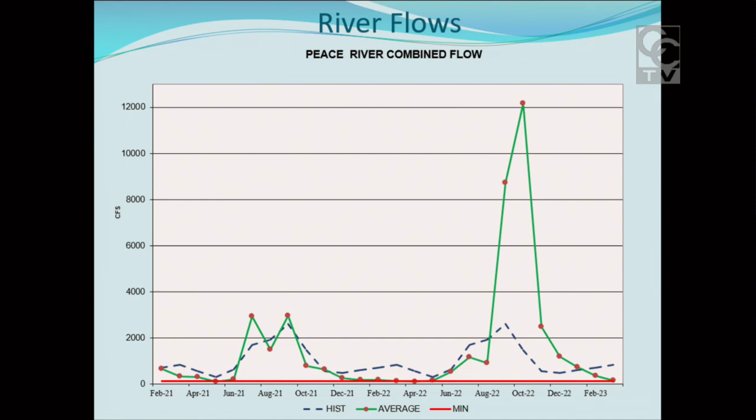River flows - as the rainfall drops, so does the river flow. We've trended down and we're now below the average as well as the 130 CFS requirement for river flow for us to take water from the river. So we are now off the river. The current flow is about 87 cubic feet per second in the river, so we're well below what we need to be at the 130 to take any water at this point.

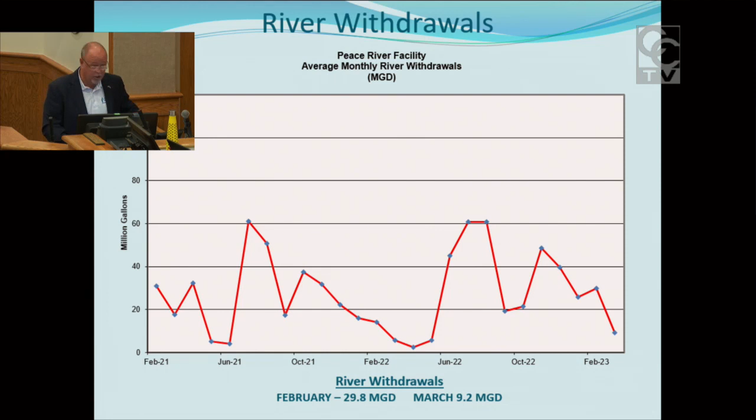River withdrawals. For the month of January and February, we averaged about 26 to 30 MGD from the river, so we were able to maintain the levels in the reservoir. In March through the 17th, we averaged about 9 MGD. After that point, we completely shut off, so we averaged about 5 MGD from the river in March, starting to rely on the reservoir for our supply.

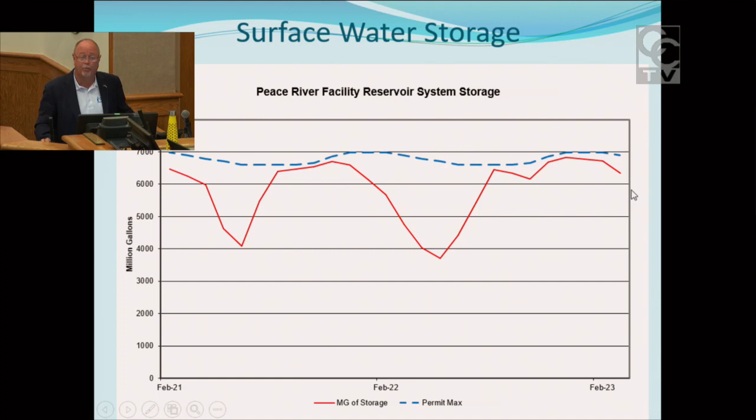Surface water storage - again, January and February, we were about 6.7 billion gallons. As we went into March, we started using water out of the system. As of the 17th, we were at 6.3, and as of today, we're down below 6 billion at about 5.7 billion gallons in the surface water system.

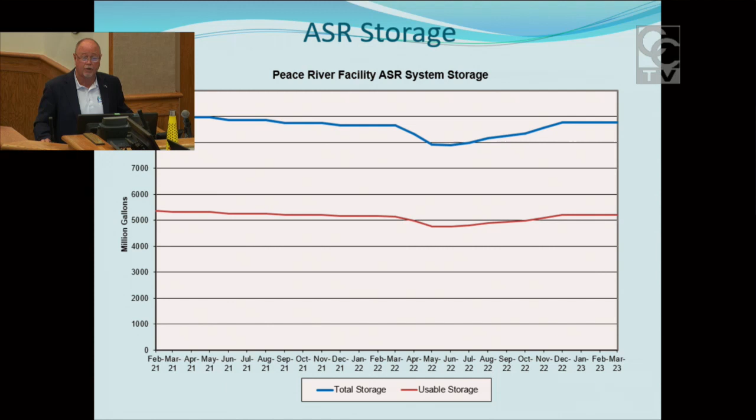ASR storage - as you can see, we've been in storage mode since about late November, December. We have about 8.8 billion gallons in that system. As of this Monday, because of the lack of rainfall, we have started using water from the ASR system. We're drawing out about 10 million gallons a day out of that system right now.

Taking a look at our estimated days of supply, if we were to provide our average day to you of about 28.5 MGD, we have 406 days of supply. If we delivered our contractual obligation of 34.7, we have about 333 days. So somewhere between 11 and 13 months of storage on hand at this point.

Now we're going to take a look at the water demands for the month of February. The authority delivered about 31.5 million gallons a day in February. Your county and city facilities delivered about 56.5 million gallons, total of almost 88 million gallons a day for the month of February. As usual, about 4.5 of that went to consecutive customers of Manatee County. Total used by the authority and customers was 83.3 million gallons.

Taking a look at Charlotte County first, your individual usage, you purchased about 13 million on average from the authority, produced about 0.8 from your Burnt Store facility, total of 13.8 average for the month of February. I want to point out on the long-term trend, looking at the 10-year average usage from 2012 to 2022, through the blue bars through September of '22, averaging about 1.8 MGD, 1.8 percentage increase per year in your usage.

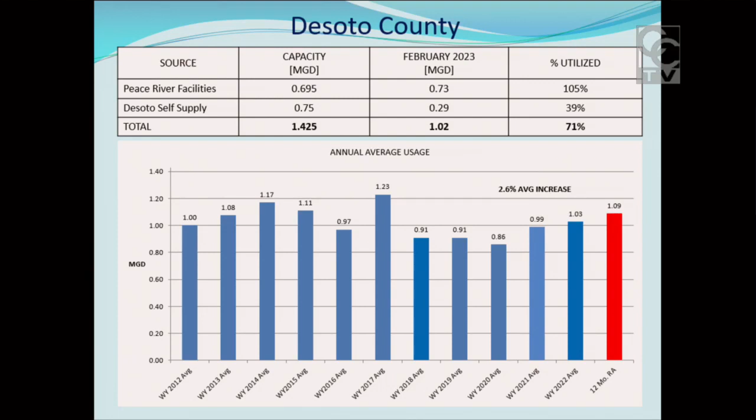Sarasota County used 15.76 million gallons for the month, imported about 3.75, and produced about 6 MGD from your facilities at Carlton and Venice Gardens. Total usage was 25.5 million gallons per day. Looking at your 10-year average, almost 2%, 1.9% average growth for the period.

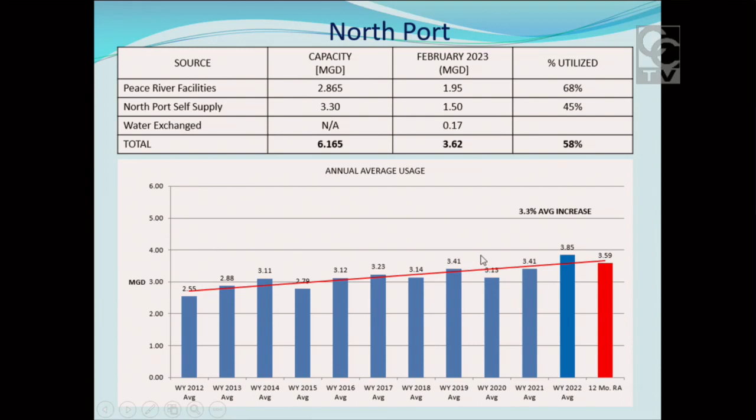And finally, City of North Port. City of North Port used almost 2 MGD from the authority for February, produced about 1.5 million, exchanged about 0.2 from Sarasota County. Total usage was 3.6. Their long-term average gets the award for the highest, at 3.3% average growth per year over the last 10 years.

Rolling it up to looking at the total regional demand for the system, looking at the growth over the 10-year period, 2.2% total average growth including the utility, the customer utilities, and the authority system. Wrapping it up, we used about 88 MGD for the month of February. That left just under 17 million available for delivery, or 84% of our available capacity was utilized for February.

I have one other item I'd like to touch on real quickly. We wanted to provide an update regarding the regional system's conversion to free chlorine. At the request of the Florida Department of Health and the FDEP, local utilities initiated a temporary change in our disinfection process, in what's commonly called a free chlorine conversion of the distribution system.

The authority and all of our customers use chloramines, which is a mixture of chlorine and ammonia. This temporary conversion basically means we turn the ammonia off and feed only chlorine into the system for a period of time.

Other systems in the area use it. City of Venice is a full-time user of free chlorine. City of Sarasota uses free chlorine on a regular basis, so it's a common practice.

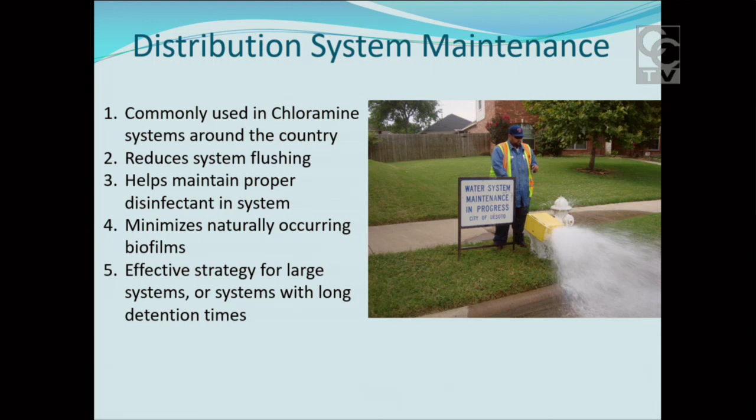Once this is done, at the end of May, we're going to meet, work over the details with your staffs, evaluate how well it went, and then determine if we need to do another conversion in the future. So with that, I'd be happy to answer any questions on that or on the regular presentation. Board members, any questions? Thanks, sir. Great, thank you.

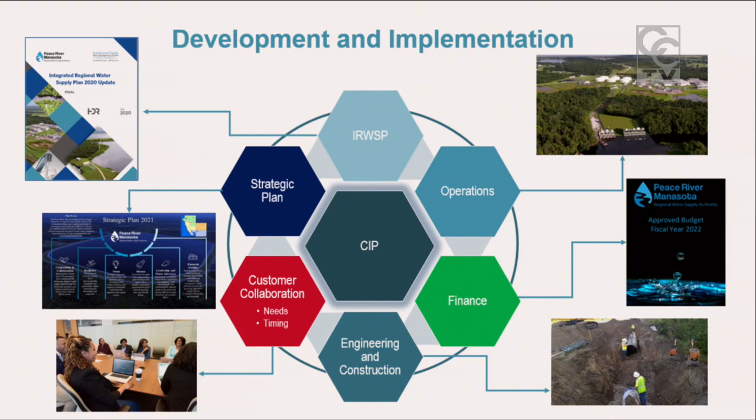So let's take a look at the overview of the next 5 years and our 20-year CNA budgets. Just a little by the numbers here — we've got 14 projects identified over the next 20 years. 8 of those projects are regional transmission main projects; 3 of those will occur within the next 5 years, 2 of which are currently under construction.

We have 4 water supply projects, 3 of which are in our current 5-year CIP. And we have 2 system-wide benefit projects, both in the next 5-year CIP. The costs and timing of these capital projects are coordinated not only with your staff, but also with the Water Management District and any federal or regulatory agencies, so that we can ensure we're getting the most funding possible for our projects.

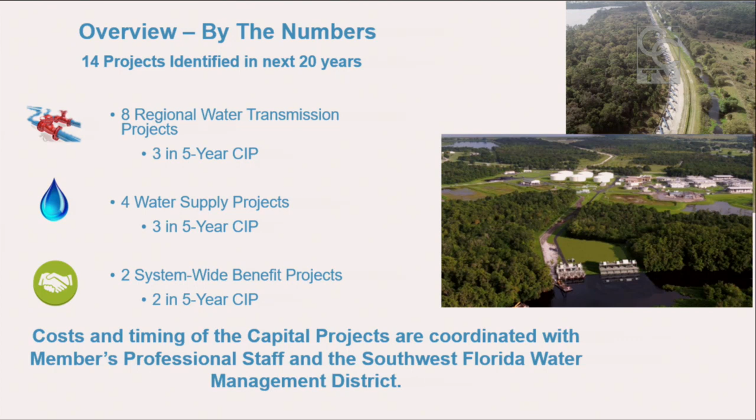Looking at our 5-year CIP, it's broken down here. We have a total 5-year CIP budget of about $815 million, broken down between water supply, transmission, and system-wide benefit projects. We have about $663 million in our water supply project bucket, $123 million in our transmission systems, and $29 million in our system-wide benefit projects.

I wanted to call your attention to this water supply bucket, the $663 million, which is really comprised of 3 projects: the PR3 project, the water treatment plant expansion — the surface water expansion project — and the brackish water RO project. Both of those latter projects are currently in the planning stage; however, only one of those water supply options will actually move forward into construction in the next 5 years, so keep that in mind.

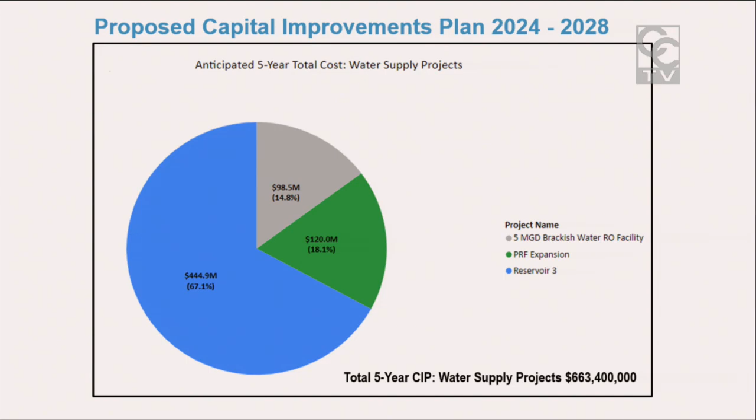We've been very fortunate in the past to receive grant funding, not only from the Water Management District, but also from state and federal entities. In the 5-year CIP, we anticipate about $184 million in grant funds, leaving the authority's estimated exposure at about $631 million.

As we move forward into the 20-year CNA, or Capital Needs Assessment, that's from 2024 all the way out to 2043, that is also inclusive of that 5-year CIP. We have a total 20-year CNA of just over $1 billion, comprised of approximately $703 million for future water supply projects, $360 million for water transmission main projects,

and that same $29 million for those 2 system-wide benefit projects. Again, looking at the estimated grant funds available, where we see about $306 million of potential grant funding to help offset those capital project funds, leaving the authority's exposure at around $787 million. Again, we've kind of blocked off this first 5-year heavy lift.

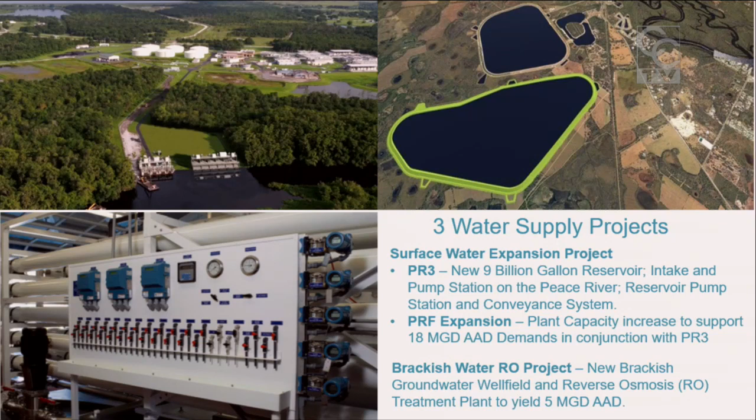Our 3 transmission system projects include the Phase 3C pipeline project. This is approximately 7 miles of 42-inch diameter water main to serve the growing demands in northeastern Sarasota County. That project is currently under construction.

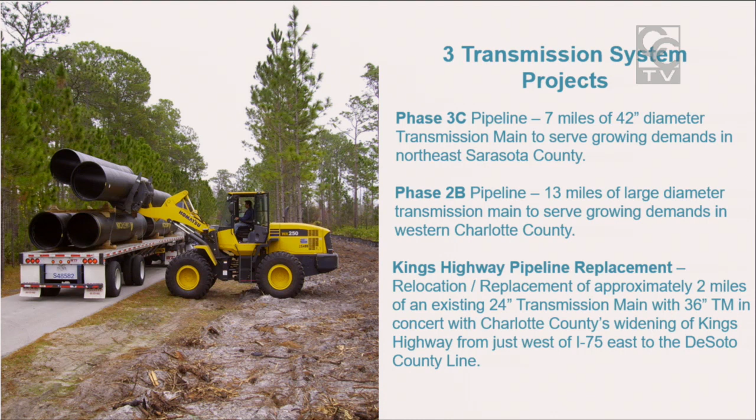The Phase 2B pipeline project, it's 13 miles, again, 42-inch diameter transmission main to serve the growing demands in western Charlotte County, and this project is nearing construction. And then the Kings Highway pipeline replacement project. This is a relocation of an existing 24-inch diameter transmission main as part of the county's Kings Highway widening project. We'll be relocating and upsizing about 2 miles of that, from just west of I-75 along Kings Highway all the way to the DeSoto County line.

Our 2 system-wide benefit projects include the Water Resources and Construction Department building. Here in the upper left-hand corner and center, you can see we are currently working out of the old ranch house and associated garage. These buildings are approximately 60 years old. We've been through numerous renovations on them already, but they really have reached the end of their useful life. We did sustain some damages during Hurricane Ian to the buildings, and we're currently looking at options to get some new facilities out there.

The second system-wide benefit project is the partially treated surface water ASR project. This includes design, permitting, and construction of facilities to partially treat our raw surface water from the reservoir system and then inject it into our ASR system. Currently, we're injecting fully treated drinking water into the ASR system. We're proposing to take raw water from the reservoir, partially treat it through filtration and disinfection, and then put that into the ASR system. It'll provide cost savings as well as increase yield and our system efficiency.

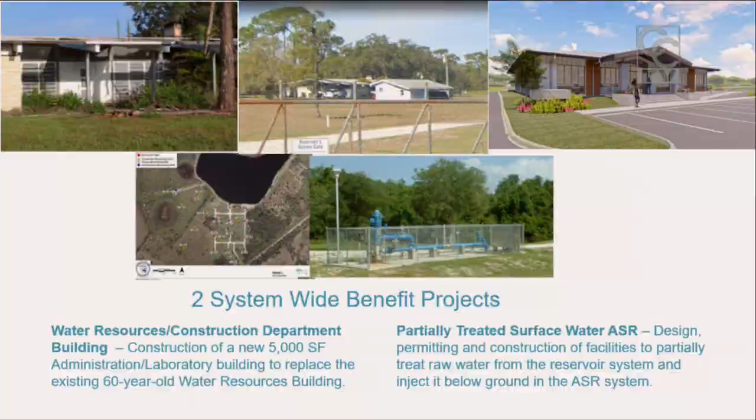So what are our next steps and schedule? The professional staff were provided a copy of this draft CIP and CNA at our March 8th board meeting, and any comments that we receive or feedback we will incorporate into the draft. We will bring that back to the professional staff for their review at our May 3rd professional staff meeting. Take any comments the board may have, put them all together, and bring the final draft back to the board for the June 7th meeting where we'll seek approval of the CIP and CNA.

I just wanted to note that approval of the CIP and CNA is not an approval of a project. It's just approving how it's incorporated into the budget. So with that, I'd like to take any questions you might have.

Board members, you have any questions for Ms. Terry? Any discussion, direction? It's a lot.

Okay, well this is just strictly for board discussion and direction for the 5-year CIP and 20-year CNA, and it will guide the fiscal year 2024 budget development in this area. So any suggestions, additions, or comments?

I have one question. The project that you said was going to drop into the 20-year out of the 5-year, which one was that? It depends — we've got 2 water supply options moving on parallel tracks. We've got the surface water expansion project, and we have the brackish water RO project. We're moving those along and developing final budgets.

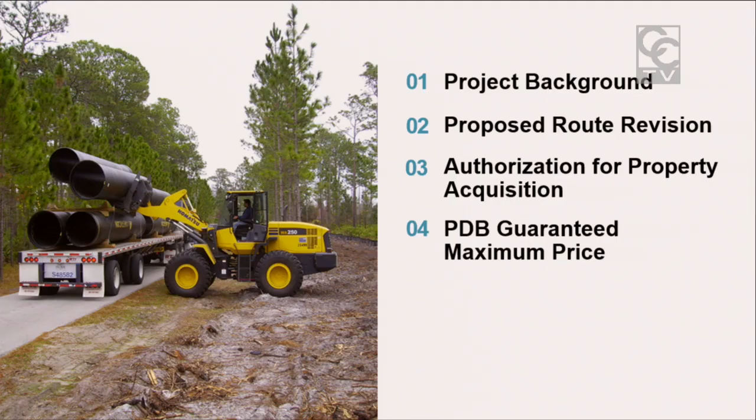I'll be discussing the background of the project, talk about a proposed route revision from our design build team, and then discuss the authorization for property acquisition — this would be our temporary and permanent easements. At the conclusion of item number 3, we'd have our first motion, and that would be to accept the proposed route revision and the easement width that's going to be proposed. Item number 4 is our progressive design build guaranteed maximum price.

After that presentation, there'd be a motion on whether to accept and amend the existing contract with Garney Construction to include the guaranteed maximum price.

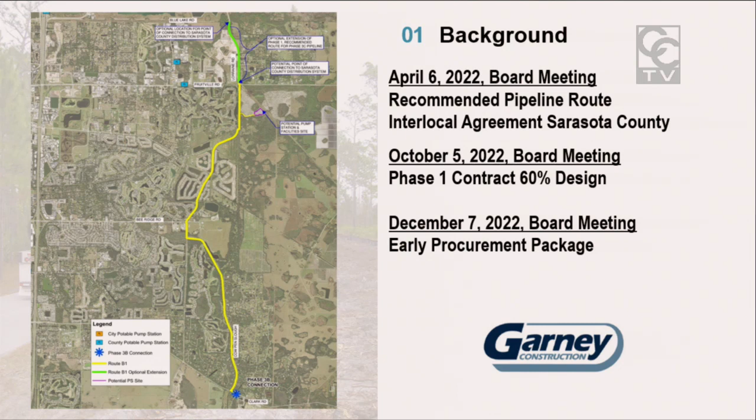So, background of the project: in April of last year, the board approved the recommended route for the Phase 3C pipeline based on our feasibility and routing report. At that same meeting, the interlocal agreement with Sarasota County was approved, funding the project. In October of last year, the Phase 1 contract for 60% design was approved by the board. And then in December, the board approved our early procurement package by means of owner direct purchase, which saved about $500,000 on the project from tax savings.

Before I go into the design changes being recommended, I'd like to acknowledge some of the staff that has worked very hard on your project. I can't put all the names up here — we wouldn't have time to talk about everybody. But it's truly a monumental task that they've gone from 0 to 60% design in 6 months on such a large project.

Starting with Sarasota County: Mike Milet, the utility director, has made himself available for any meeting we've requested, and his direct involvement has led to cost savings on the project. Greg Rouse has been our point of contact with the utility department. Stoney Pope has helped us with the hydraulics in the county system. And Peter Peduzzi, the PM for the Lorraine Road extension, has kept us apprised of his project, in which about a third of our pipeline goes through his project area, so that coordination has been critical.

Our general counsel has helped us with our first progressive design build contract, and my first time with easement acquisition — so we appreciate that, nice young man Doug Manson, Brian Bolvis, and Carlin Kowalski. On our design build team, they have met every milestone we've put in front of them, so thanks to Mark Kelly with Garney, Ben Turnage with Ardurra, and Freddie Betancourt with Wade Trim. And then our owner's agent has helped us with very timely reviews of that contract and technical reviews from the pipeline design, so thanks to Mike Condren, Todd Basso, Liz Minyard, and Rod Pope.

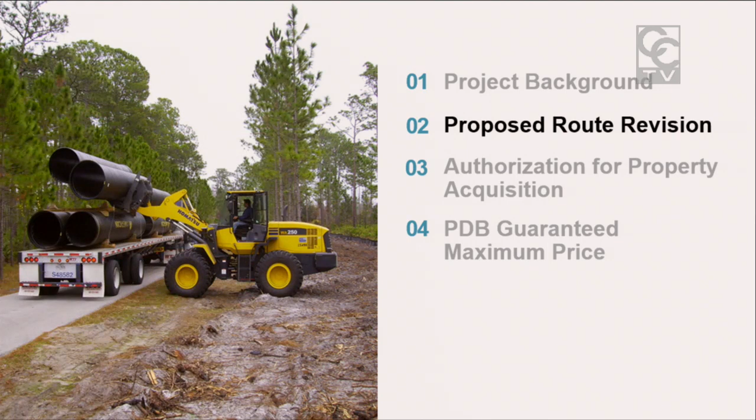So our second item, the proposed route revision. This is a recommendation by our design build team. The exhibit you see in front of you here is from the feasibility and routing report.

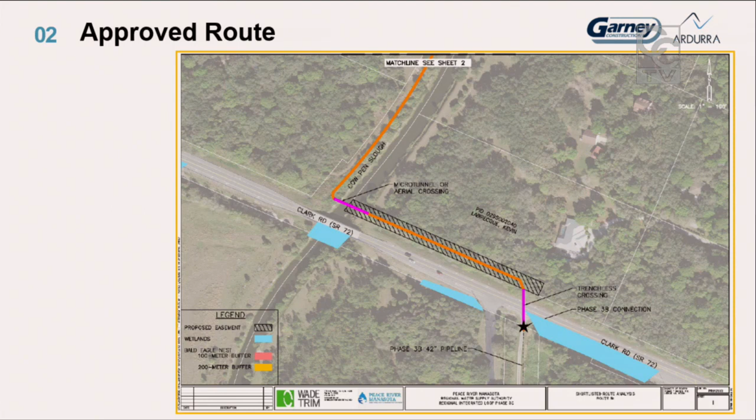It covered crossing Clark Road, running left-right on your screen. It was originally proposed to cross Clark Road on the eastern side of Cow Pen Slough, going across to a proposed easement on a private residential property, then proceeding west across Cow Pen Slough and then north. I'm going to rotate this slightly for ease of comparison with the current route shown here.

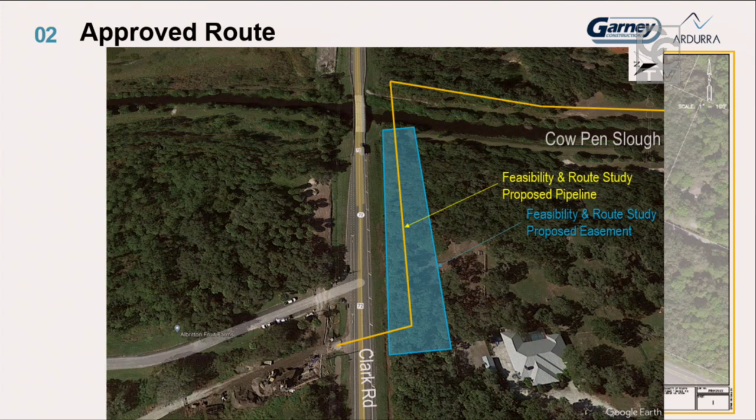This is in blue, the proposed easement on private residential property. What the team has done is take a deeper look at long-term planning with DOT, the existing utilities out there, and constructability. Really, the main reason for the change is taking advantage of existing easements out here.

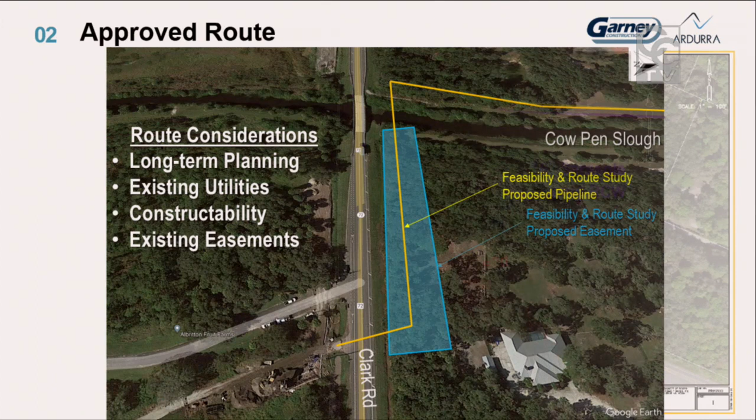So the design build team has recommended to stay on the south side of Clark Road in lieu of crossing over immediately. The reason is there's a 30-inch diameter Sarasota County water main already on the south side of Clark, with an existing easement over it. Through coordination and collaboration with Sarasota County detailed design, we've determined that both pipelines can fit within the limits of that easement.

So those two properties on the south side are already encumbered by a utility easement. For that reason alone, it just makes sense to stay on that south side. But there are other reasons for making that change, as mentioned above.

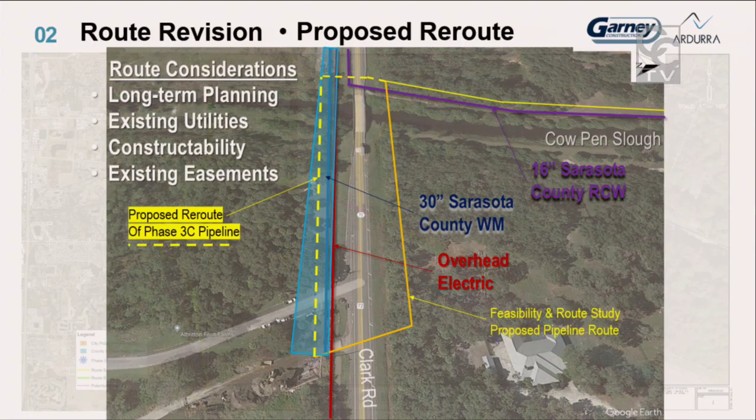So I'd like to take a minute if anybody has any questions about the proposed change in crossing location for Clark Road. Board members, any questions? Makes sense. Great, no, thank you for that.

I know, speaking to Mike, and I appreciate you mentioning his collaboration. He's got a lot of things on his plate, but he was very encouraged by this, and it makes a lot of sense, so appreciate the change. Great, thank you.

So we are requesting a total of 75 feet for the entire length of the pipeline project. However, we are requesting a little bit more on the south side of the project.

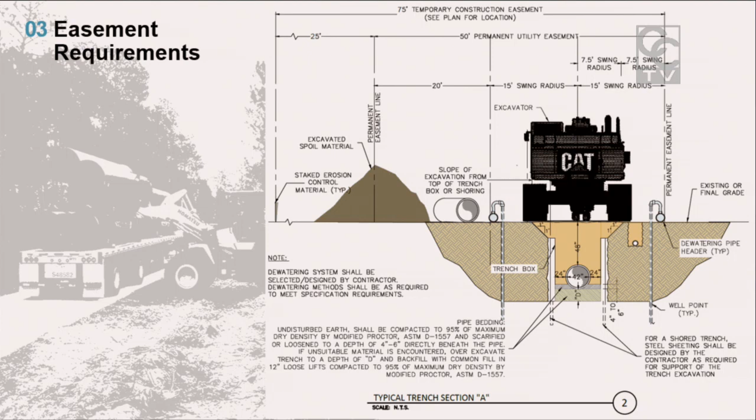For the first mile north of Clark Road, we are parallel to a 16-inch diameter reclaimed water pipeline at Sarasota County. We're requesting an additional 5 feet of temporary construction easement, so a total of 80 feet for that first mile, which gives the contractor some flexibility to try to avoid relocating that 16-inch diameter pipeline. So essentially it's 75 feet the whole way, except for that first mile, which is 80 feet.

In your board book, there are legal sketches and descriptions over 14 parcels. Each one has a permanent easement legal sketch and description, and a temporary construction easement description. Those would be entered into the amended resolution as exhibit number 2.

This amendment to the existing resolution, which covered just the alignment last year, now covers the change in route on the Clark Road crossing and the easement acquisition we just discussed. So before we go to the motion, does anybody have any questions about the width of the easement we're requesting?

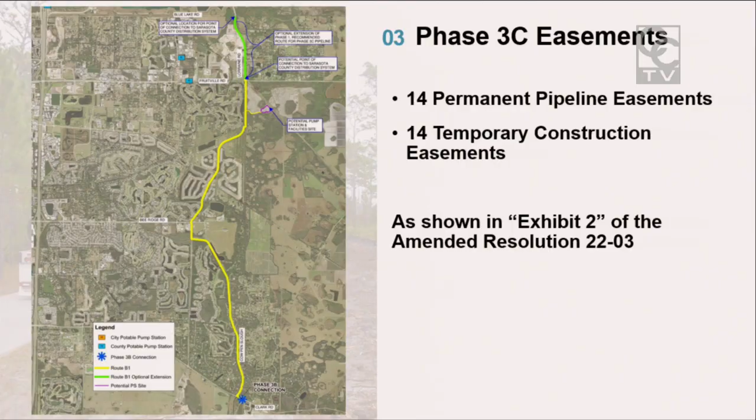Don't believe so, Mike. Great, thank you. Okay, we're ready for the motion?

Yes, sir, for the first motion for A. Do I hear a motion? Move approval. Second. I have a motion by Commissioner Cutsinger, seconded by Commissioner Truex, to amend Resolution 2022-03 for the Regional Integrated Loop Phase 3 Interconnect. All in favor signify by saying aye. Aye. All opposed, like sign. Motion carries 4-0. Okay, great, thank you.

All right, appreciate that. Our fourth and last item for Phase 3C, we've got the Progressive Design Build Guaranteed Maximum Price. This would be an amendment to the existing contract with Garney to include the Guaranteed Maximum Price, which covers final design and construction of the pipeline.

So where we're at with the Guaranteed Maximum Price: the design portion is about $2.26 million, the construction phase of the pipeline is at $37.8 million, and we have contingency and allowance in the amount of about $9.9 million. Now, the contingency needs justification and approval from the authority to use on the project. So the total guaranteed maximum price we're requesting is about $49.9 million.

We do also have what I'll call parallel costs to this project, costs not included in the guaranteed maximum price, but which the project budget will incur. These include the Phase 1 contract with Garney already completed for 60% design, owner direct purchase of pipes and valves, work orders with Stantec for property acquisition and field data collection, our owner's agent work orders, an allowance for mitigation and insurance, a third-party review being negotiated with the district, a legal assistance allowance with our general counsel, and our estimated cost for easements. The total of those parallel costs is estimated at about $12.3 million.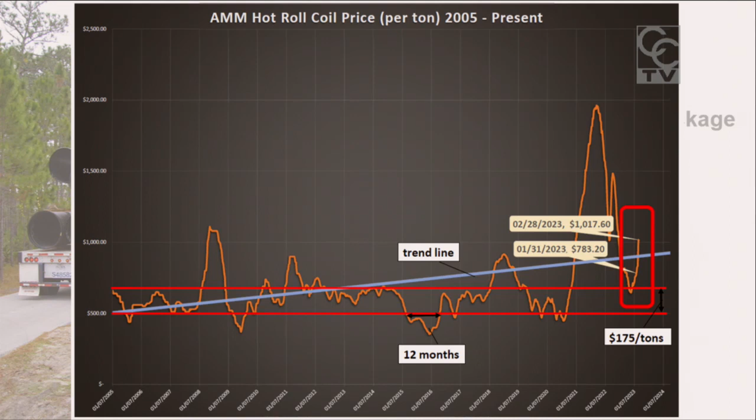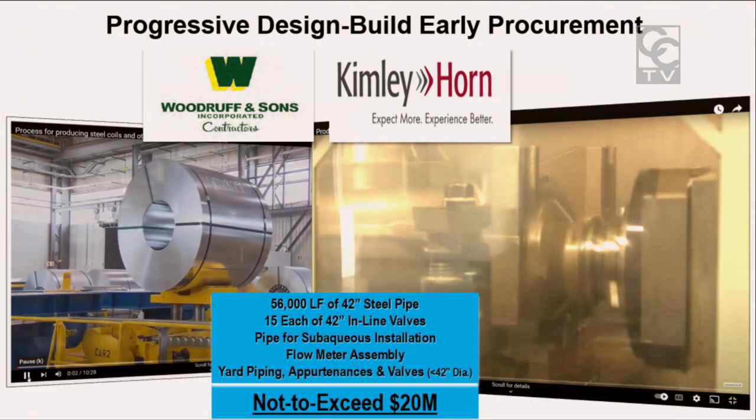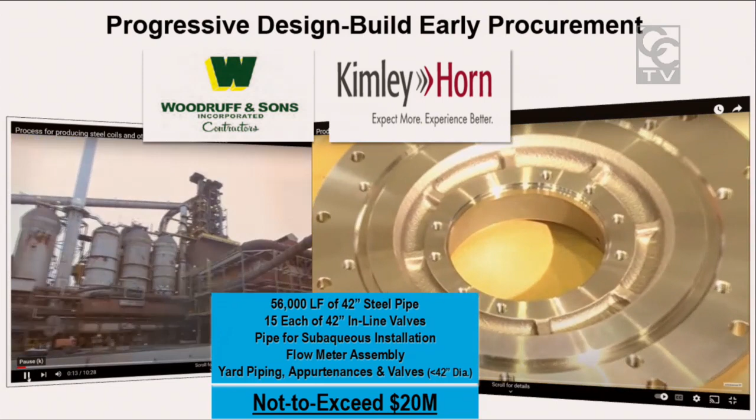So we are requesting, through owner direct purchase, the ability to purchase 42-inch diameter steel pipe, 42-inch inline butterfly valves, pipe for our subaqueous crossing of the Myakka River, likely HDPE, a flow meter assembly, and associated yard piping, appurtenances, and other valves less than 42-inch in diameter, with the value not to exceed $20 million.

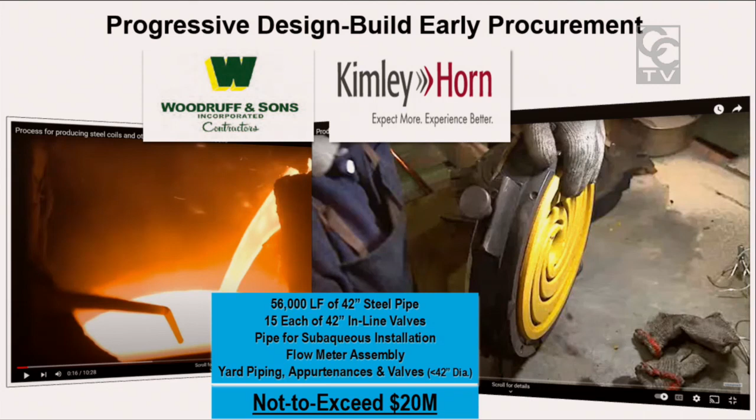So does the board. I'll pause for any questions the board might have before we go to the motion to allow us to do owner direct purchase not to exceed $20 million.

Board members, any questions? Okay, Mr. Chairman. Yes, sir.

Move to authorize the executive director to purchase materials for the regional integrated loop Phase 2B pipeline, not to exceed $20 million, for items which are purchased under Section 5.4.4 of the authority's procurement policy.

Okay, a motion by Commissioner Truitt. Do I hear a second? Okay, second by Commissioner Cruz.

Any further discussion? Just that I think this is a great idea, and if there's any way we can incorporate this in the future for cost savings, it would be an opportunity. It's not taking money out of the contractor's pocket, but it's putting money in ours. So I think we should try to do that when we can. Thank you. All righty, no further discussion.

All in favor, signify by saying aye. Aye. All opposed, like sign. Motion carries 4-0. Thank you, sir.

Thank you. Agenda item number 7, Mr. Terry.

Mr. Chairman, members of the board, for the record, Terry Holcomb with your staff. Regular agenda item number 7 is an update to the Peace River Regional Reservoir number 3. This is our 30% update as part of our preliminary design, permitting, and third-party review phase. The presentation is for informational purposes only. There's no board action required today.

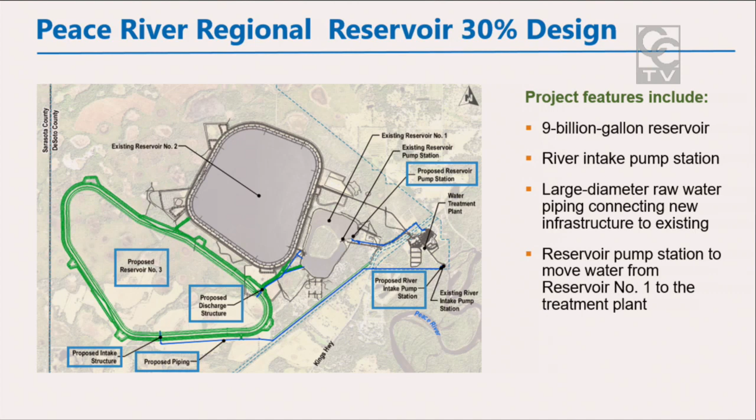Just a real quick general overview of the schedule. We talked about it taking 10 years to develop a project of this magnitude.

We indicated back in the 2020 update in the Integrated Regional Water Supply Plan that new demands would be needed in the region by 2030. So working backwards, siting and feasibility study took place, design and permitting, anticipated construction, knowing that it may take up to 2 years to fill that new reservoir.

Here is our general schedule. Right now, we're in the preliminary design phase, the permitting and third-party review. That's shown in the solid orange. This is where we are in the project's progress. This phase began in March of 2022 and will conclude this September.

It will provide preliminary design for the project features, including their location, the size, how many, and the ultimate configuration. The permit applications will be submitted for this project in September, and that will conclude the preliminary design phase for the project.

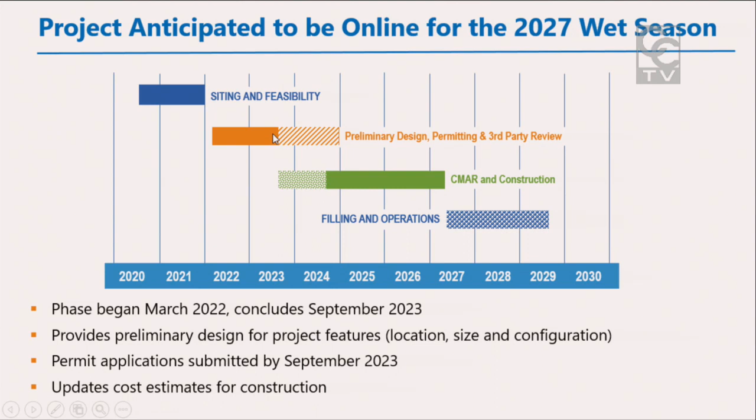The design documents do include an updated cost estimate, and the Water Management District will be completing their third-party review of the project, including not only the design documents, but also that cost estimate that comes along with it.

Right now, I'm going to turn it over to Katie Duty to cover the design updates from our 15% presentation to our 30% presentation here.

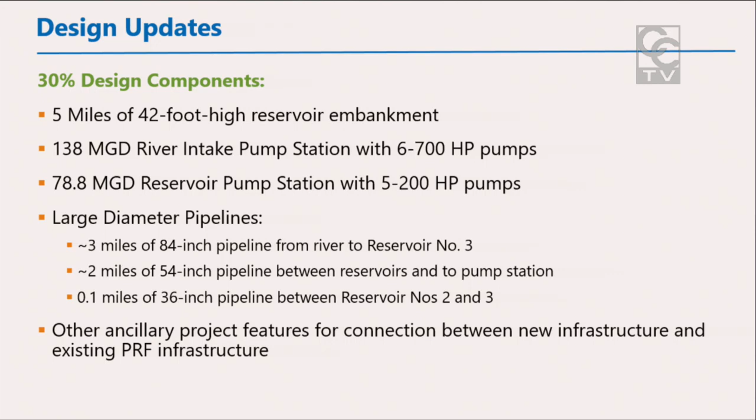Terry mentioned the 2 pump stations we have. So the river intake is 138 MGD with capacity or space to be able to add pumps for future capacity later. There's also a 78.8 MGD reservoir pump station she mentioned. And then we've got many miles of large diameter pipeline that will connect the new river pump station over to the reservoir, interconnection between existing water storage facilities, and then back over to the plant.

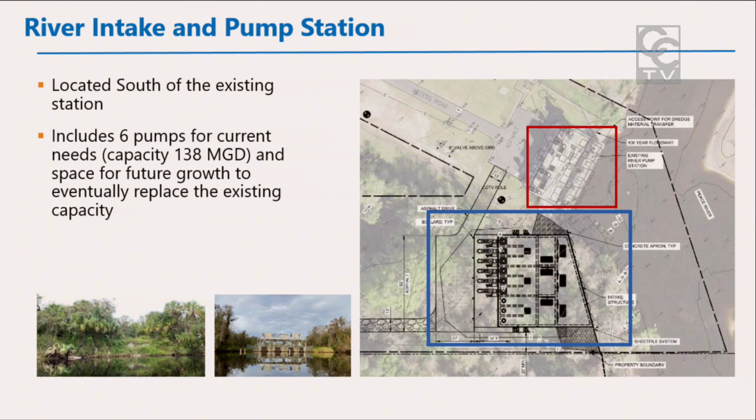Next up is all the conveyance. This diagram shows the existing in black and the new conveyance in orange. And at the 15% design, we had worked with authority staff to really maximize flexibility of how water could be wheeled around the water campus.

It resulted in a price that might be a little bit too expensive, and so we really sat back down with the authority staff and worked on what is needed for how to operate. Still providing some flexibility of moving water, for instance, between reservoirs 2 and 3. That's an important consideration for operating the facility and having maximum water quality and flexibility for where water comes from.

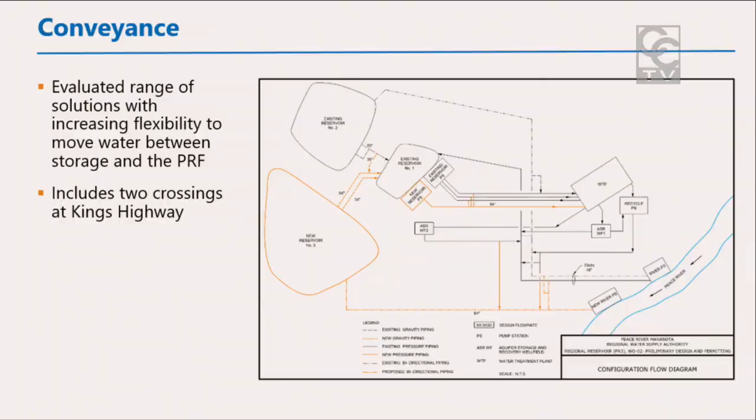But we've dropped out some of the large diameter piping that would have allowed water to move from Reservoir 3 to a different part of Reservoir 1. So there's some 54-inch pipe that's come out, as well as some aerial crossings. And really, at 30% design, this balances the need for flexibility while also value engineering out some things that may not have been used as frequently, such as a gravity line back to the plant. This also includes a little bit more detail on 2 crossings at Kings Highway.

Our reservoir design further progressed, and we're really focused on detailing out the cross-section of the embankment. These particular details, how the reservoir is going to function both in normal operating conditions and emergency operating conditions, is really important for the permit we're going to submit later this year. That'll be the core of what we're looking at as we work through permitting.

So the team has progressed the design, the seepage control system, and at 30% we've got 2 possible cross sections, one very similar to the existing cross section, one a little bit different, will function the same. We're looking at constructability right now of which will be easier to construct, what's more cost effective, what's going to have the least risk when it comes to dewatering, which is a big component of embankment construction.

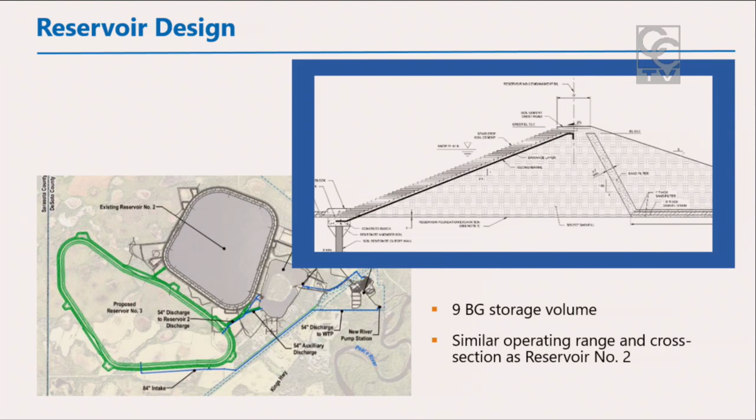Moving to the reservoir pump station, this is again adjacent to the existing. The red box on the left side of the image is the existing Reservoir 1 pump station. The blue box is the new one. It includes 5 pumps at this location.

The team spent a lot of time working with authority staff to evaluate the pros and cons of building a new pump station adjacent to the existing versus replacing or rehabbing the existing, expanding it. There's a real need to have the existing pump station in operation, that's how water gets from any of the water storage back over to the plant. So during construction, there cannot be interruptions to that ability to operate and move water. And so it was decided to place the pump station adjacent to it.

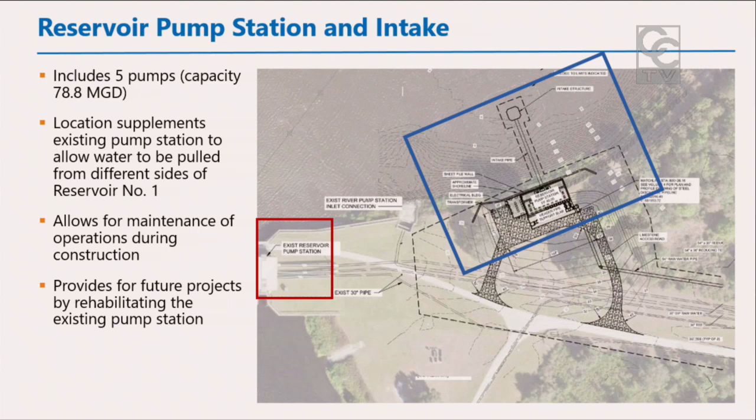The intake for it comes out of the northern side of Reservoir 1, so back to operational flexibility and maximizing water quality - that was part of the siting decision. And later, that Reservoir 1 pump station, because it's still there, can be rehabbed and will help future authority projects in being able to move water around.

So a big part of the early design has been field work. For site characterization, we've done over 100 explorations. That includes borings, cone penetrometer, putting in monitoring wells, really understanding the groundwater and how it changes seasonally. That's another big part of both design and permitting.

We also recently completed over 26,000 linear feet of geophysical investigation. This is to do some seismic investigation and also look at sinkhole propensity and make sure there's no issues related to that. We don't see concerns on the site for those issues, but as part of a thoroughness of design, we really need to make sure the site is suitable, including issues related to karst.

We've completed generally all of the site topography. We've completed the bathymetry. There's a little bit more field work when it comes to data collection. In about a month, we'll get our geotechnical report from our driller that quantifies this - we've been getting progress reports as we go, but we'll get the final site characterization report from them.

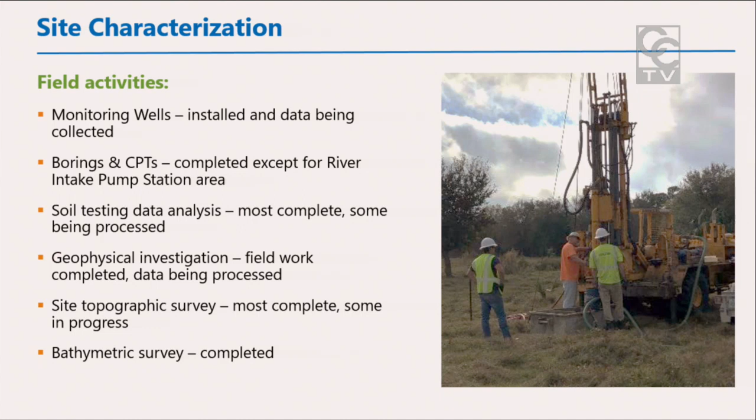Environmental is the other big field component, and so the wetland delineation, as I think I talked last time, we'd completed all of the wetlands delineation in areas impacted by the construction, and the team has really been working through how do we mitigate for those wetlands. It's in 2 different basins. There's some tightness on available credits when you look at banks in those same basins, and how do we make sure we fit the project site and minimize environmental impacts as we have them.

The team has recently been working on maximizing our on-site creation potential. The authority staff has done a really great job of having an on-site mitigation for Res 2. How do we expand on what's worked really well and also save some money? It'll be a less expensive way to work through mitigation if we can.

And then we've had some ongoing threatened and endangered species surveys. There are certain times a year we have to do nesting surveys or other species. Those are just about wrapping up, and we'll have a report of the work out there that'll be part of our permit application later this year. So just to quantify real quick, the figure on the right shows the bolded colors that show the wetlands that are being impacted by the project site.

It's a little bit faint, but you might notice the red outline is the new infrastructure going into the reservoir. You can see we've adjusted the reservoir footprint to try to avoid hitting some of the higher quality wetlands, really trying to get that balance of maximizing storage and minimizing impacts.

So this is the quantification of where we are right now on functional loss, what's being impacted by the construction.

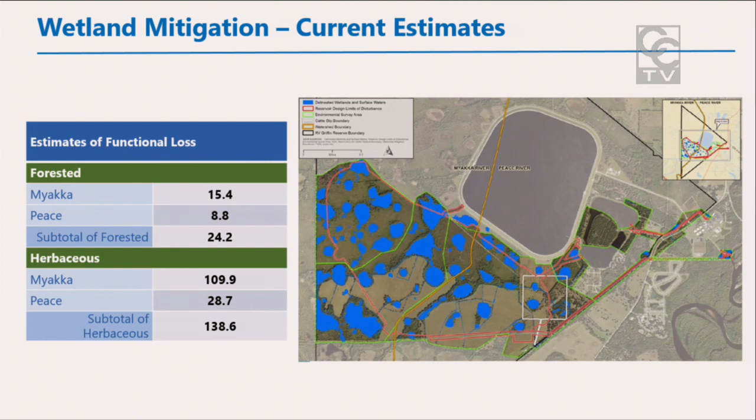Just a quick update on permitting. We've got some upcoming pre-application meetings with both DEP and the Corps of Engineers. We've had pre-application conversations with them, and this is continuing to progress. We're looking to submit a conceptual permit application next month, and then we'll follow up with a full permit application in September. Other agencies also consult on these permits, so we've been coordinating with U.S. Fish and Wildlife and National Marine Fisheries Services just to make sure we're considering the things they're concerned about so we don't get surprises later.

And with that, I'll turn it back to Terry.

Thank you, Katie. So as part of HDR's work order, we requested a Class 3 cost estimate to be completed with the 30% design. What I wanted to do is just kind of real quickly go through exactly what a construction cost estimate classification system is and what does that mean with respect to the PR3 project.

What you see here is a chart that's developed by the Association for the Advancement of Cost Engineering. This is a widely used industry chart defining the level of accuracy within construction cost estimates. On the x-axis, this is the life of a project as it goes through the design process, starting at basically project conception, going all the way over to 100% design.

On the y-axis, you can see the range of accuracy given your estimate amount. Your estimate amount travels along this line in the middle, and the range of accuracy starts very wide at the concept phase. You could be minus 50 to plus 100% from your cost estimate, and that's probably within your range of accuracy. As the project moves through design, through the 15%, 30%, you're into a Class 3 estimate. This is more parametric—you're using projects that have been developed recently, you might be getting a couple quotes from vendors on things. As the project progresses, that range of accuracy decreases. The more certain you are in your design, the more accurate your cost estimate becomes.

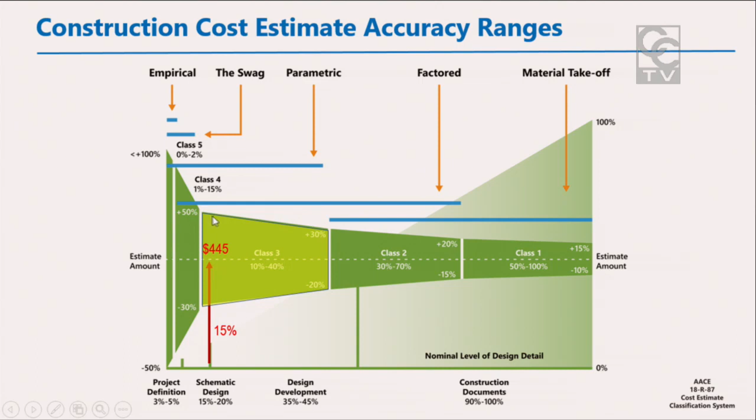So just taking a look at where we were at our 15% cost estimate: we were there in October, and the estimate was at $445 million. This came with a range of accuracy anticipated of anywhere from minus 30% to up to 50%—that's about $311 million all the way up to $660 million. That's the range of accuracy at that 15% design we were at.

Today, at the 30%, we are at a cost estimate of $343 million, about $100 million less. That range of accuracy has also decreased because we've become more certain in some of those design elements. So that range of accuracy is about minus 20 to plus 30.

Now, as we move forward into the final design and engineering phase, we would anticipate that range of accuracy will become closer—it'll decrease, and our cost estimate will be a little more certain. We would like to engage a construction manager to come into that final design phase. When you bring in a construction manager, you have some more value engineering that can be done. I believe in Mr. Knowles' presentation, he talked about that early engagement during the Phase 3C project where they were able to identify some cost savings measures. It's really beneficial to engage that contractor early on, so we anticipate doing that as this project moves through the final design phase.

So Katie kind of touched on some of the items that we were able to find some cost reductions in between the 15% and the 30% design. In December, we had a presentation to the board where we were looking at some of these potential cost reduction options. At the time, those 6 options totaled about $80 million, and you can see we've been able to drop the budget by about $100 million.

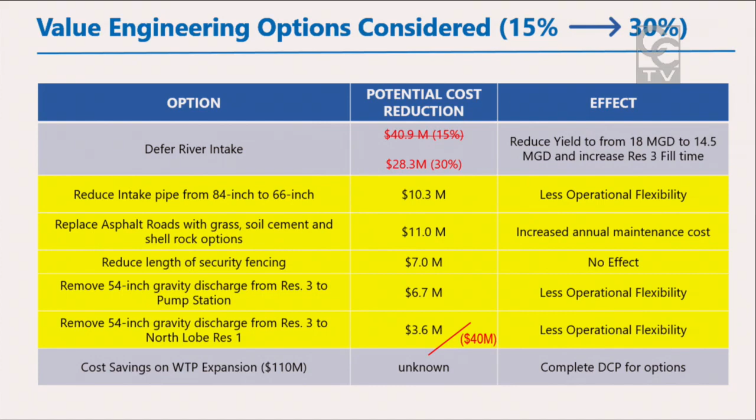And then the last item here, the cost savings on the water treatment plant expansion. Again, we are currently in the preliminary design phase. We have our owner's agent completing a design criteria package. We've got the pilot plant out at the facility now. This $110 million, again, keep in mind, is the conceptual budgeted number on the left-hand side. As we move through this design criteria package, we anticipate getting a better number and seeing maybe some potential for cost reductions.

We were able to remove some of those large diameter pipelines, might have a little less operational flexibility, but it's still moving the water where we need it to be. The reservoir, you look at the cost of the reservoir, it really didn't change that much, which is what you would expect. It's a lot of earth movement, right? A lot of dirt. There's not a lot of mechanical, electrical equipment, not a lot of volatility in dirt. So that cost remained the same.

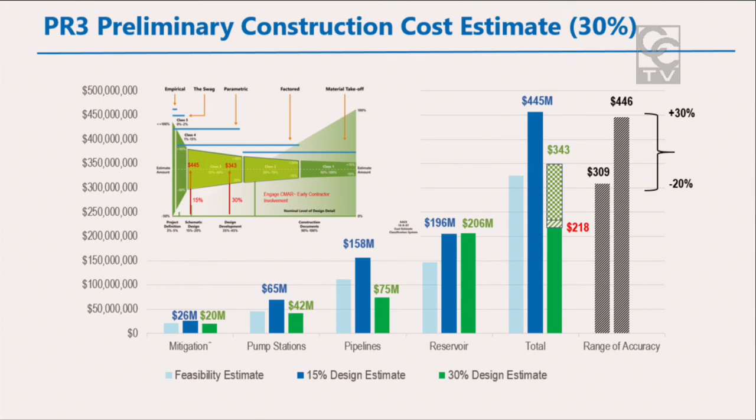You roll those all up, and you can see the difference between the total cost of the PR3 project at 15% at $445 million to the 30% design estimate at $343 million. Just again, to remind you, we're at a class 3 estimate, so we have a range of accuracy anywhere from -20 to +30. But also keep in mind that we have $112 million committed from the Water Management District for this project. And as Mr. Manson noted, we have $12.5 million, hopefully, within the legislative budget for the project, taking the customer's contribution down to about $218 million for the PR3 project.

Talked a little bit about those funding opportunities, just wanted to break out the design and the construction phases here. So the preliminary design was at $7.25 million. We will be moving forward into final design and have an estimate of total design fees of around $18 million. However, we have secured $14.75 million in grant funding for the design of this project. 100% of the preliminary design has been covered, and about 90% of the final design is anticipated to be covered for this project.

With additional funding from the Water Management District, the authority and their customers' exposure is about $1.65 million for a full 100% design budget. It's about 90% covered. On the construction side, again, we're at that $343 million estimate with $112 million committed from the Water Management District and the potential for $12.5 million from the state. We're looking at about $218 million for the construction side of the project.

Just real quick, going into some of the next steps, we talked about as part of the district's funding, we will be doing that third-party review. That's starting this month. They will look at not only the design documents, but also those construction estimates. The conceptual permits are anticipated to be submitted in May, next month, with a full permit application to all the regulatory agencies for their review being submitted in September, which will end the preliminary design phase.

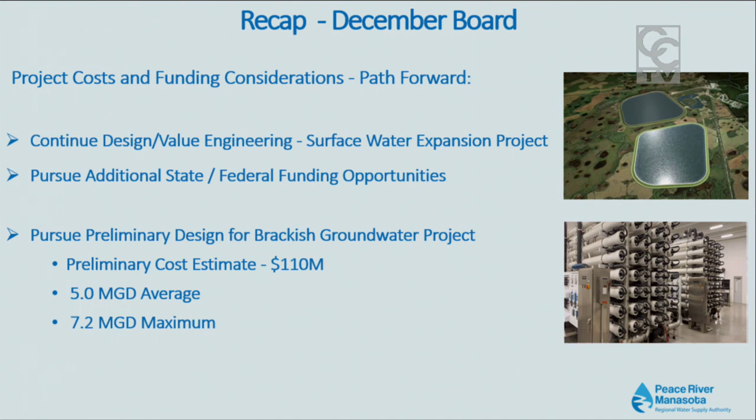We simultaneously talked about pursuing preliminary design for brackish groundwater as a potential alternative water supply project to the surface water expansion project, should the board decide to want to do that. The estimated cost preliminarily for this project would be $110 million, yielding about 5 MGD on an annual average basis, about 7.2 million gallons a day on a maximum daily basis.

So we developed a scope of work for both hydrogeologic and engineering services. The hydrogeologic drilling program is going to be looking to try and determine production capacity of the wells and the aquifers that we have, the groundwater quality of those particular aquifers, and looking at ways we might optimize the well field. That could be the well design, the configuration of the well field, and also looking at a potential water use permit modification to see if it may be feasible for us to increase production above 5 MGD annual average and 7.2 MGD maximum daily. So that's also part of the project.

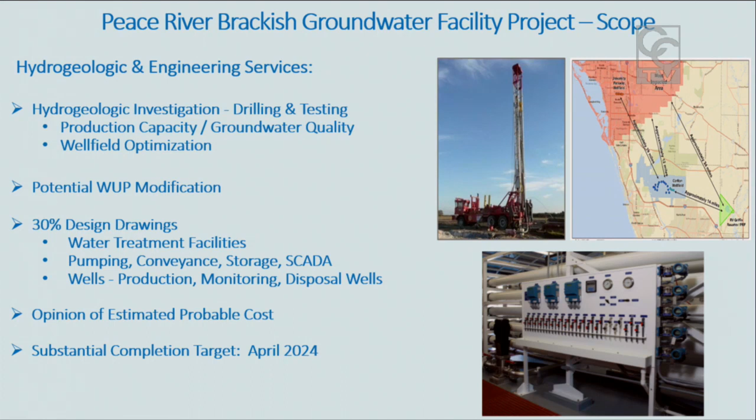We would anticipate receiving 30% design drawings of the water treatment facilities, pumping, conveyance, SCADA systems, also the wells themselves, both the production wells, the monitor wells, the concentrate disposal wells that would be required, and receive an opinion of probable cost for the project. We would be looking for substantial completion of the project by April of next year, so about 1 year from today. That's a pretty aggressive schedule for doing a 30% design, but that's what we're attempting to do here.

So for the consultant selection process, we did a request for proposals on February 10th. We received 5 proposals on March 13th, and the selection committee met shortly thereafter. The selection committee was unanimous in its rankings and ranked Carollo Engineers as the #1 and recommended consultant to undertake the project. The other consultants that were involved are also shown here.

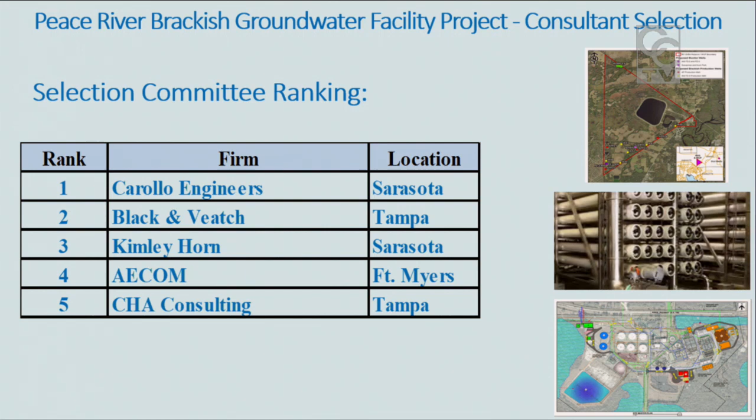And the motion is here before you. If there's any questions, I'd be happy to answer them. Board members, do you have any questions? Mr. Jim? Okay, hearing none, I'll entertain a motion.

Mr. Chairman, I move we approve the Professional Services Evaluation Committee's recommended ranking and authorize the Executive Director to negotiate a professional services contract and the scope and fee for the first work order, preliminary design services for the Peace River Brackish Groundwater Facility project, with the highest ranked firm, Carollo Engineers. The negotiated contract scope and fee will be considered at a future board meeting.

Second. Okay, I have a motion by Commissioner Truex, seconded by Commissioner Cutsinger. Any further discussion? Hearing none, all in favor signify by saying aye. Aye. All opposed, like sign. Motion carries 4-0.

Thank you. All right. Mr. Coates.

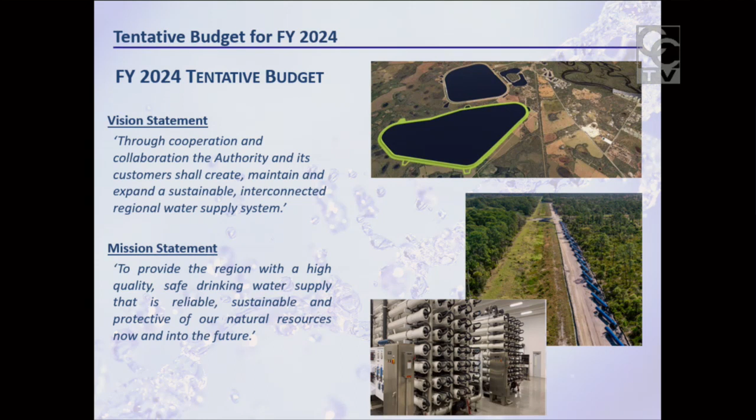The development of our annual budget is guided by a number of documents. Those include the 2005 interlocal agreement, the amended master water supply contract, and utility revenue bond documents, which include debt service schedules and debt service coverage obligations — Ann Lee mentioned a few of those. The board has adopted budget policies for maintenance of reserves, contributions, and assessments. The capital improvements plan that Terry talked about needs to be considered, and the strategic plan the board adopted in 2021 also needs to be followed to make sure we're on the path you've set for us.

In addition to developing a budget consistent with the documents I just mentioned, other obligations and initiatives also drive the development of the annual budget. These include maintaining the supply capacity in our facilities — that's 34.7 million gallons a day allocated to our customers for the Peace River facility — and delivery of the estimated 32 million gallons a day requested by customers for delivery in 2024.

We dive a little deeper into some of these individual components, operation and maintenance. Power and chemical costs have increased significantly, and those are driving that. Power and chemical costs are up about $900,000, so 7% over the 2023 budget. Staff and benefit costs are projected to be up about 9.5%.

That's almost $700,000, including adding one new personnel with the authority, and a 7% average increase in compensation across the board. We've got a 63% increase in property insurance, and Ann talked about that a little bit earlier. Renewal and replacement, repair and maintenance costs increased about with inflation, around 7%, and really no change in most of the other operation and maintenance cost centers.

Our other rate-related expenditures category includes the items identified there. These represent mostly internal fund transfers, contingency funds, debt service coverage amounts, totaling $9.6 million in the budget.